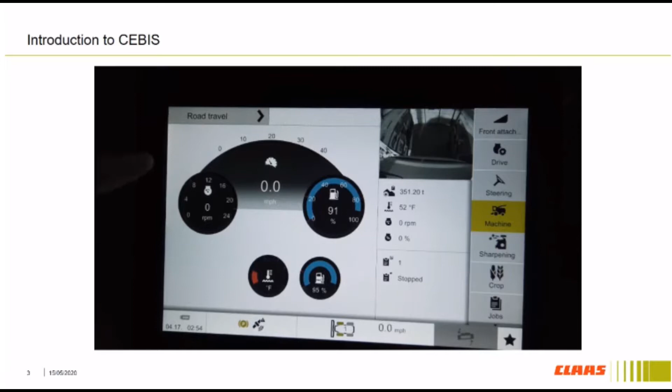So today we'll talk about generalities of the new CEBIS Touch monitor. First thing is we have two screens: what we call road travel mode, as well as our working mode, so you can see different menus depending on if we're on the road or in the field.

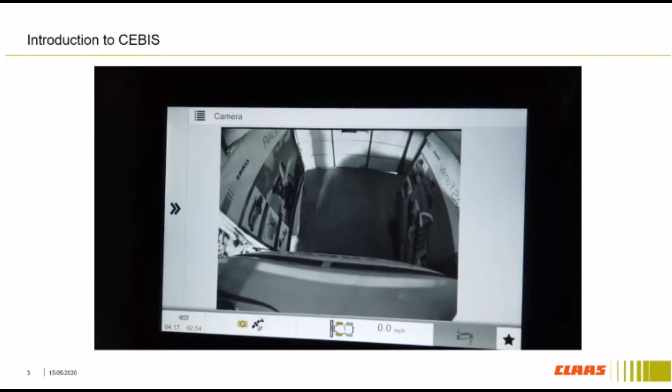Some nice things about the road mode is if you get the rear view camera, you can have that displayed in your monitor. If you tap it, you can have the rear view camera show up. If you're trying to hitch onto a wagon or just backing up, you can have that full screen.

If we go into the field working mode, we have a lot of different things that we can touch with the monitor to adjust. First one is our job counter. We can have 1 through 20 jobs, or if you get the task management, you can load up jobs from like Trimble, Ag Leader, or whatever into here to have more detailed looking jobs.

The chopper icon you see is green. That will show you where you can change your different settings on the machine. If you get cameras, like your rear camera, you can have that pop up there if you want to look at the stubble of the forage harvester, if you're making sure you're picking up the crop, or when you're backing up to something else. You can also make it go full screen to have really good visibility as well.

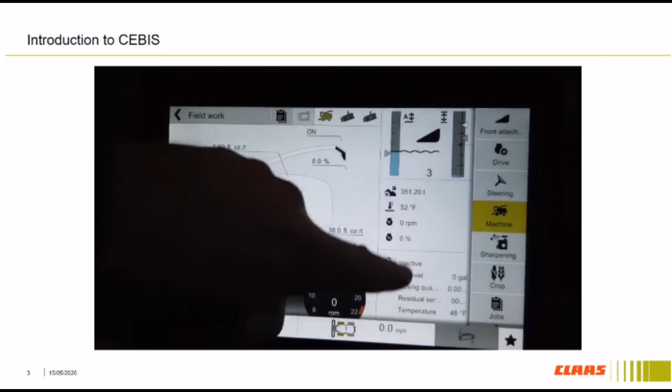We do offer cameras - you can have rear backup camera, you can have the Profi camera on the spout, or with autofill you can have the autofill show up there, as well as one of these three boxes on the side. So in these three boxes here, you can adjust to whatever you would like to see in them. So if you want, this is setting up our header heights and flotation.

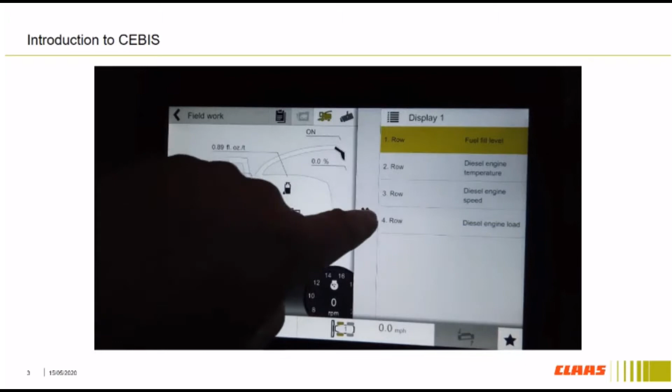This is just a normal display 1. You can change what you see on display 1, so you have plenty of different things. So if you want to see fuel level on there, you can have fuel level, and then always a double arrow gets rid of the screen. And there you can have fuel level.

And on the bottom one, just for example, we are showing we have the new ActiSiler 37 showing the details of what it's doing with fill level, temperature, how much is left, if it's active or not active, that type of thing. The main things to look at here in the working menu is we've got our different things we can change.

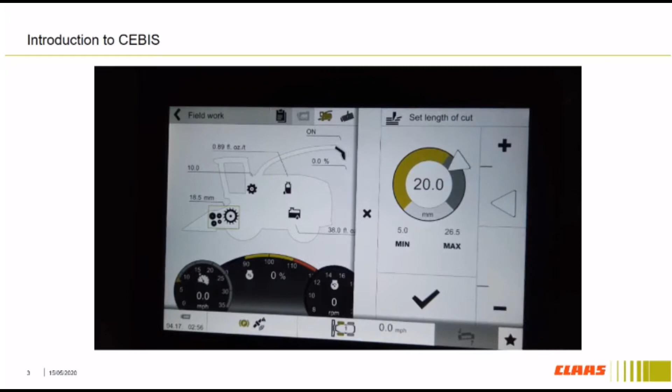So there's many ways that you can change this number. The first way is you can move the arrow back and forth by sliding your finger on the screen. You can use the plus minus key to change the length of cut, or you can tap on the number and type in the length of cut that you want.

And then the last one is over on the right hand side of the armrest, the back button. It looks like a knife cutting through some lines. You can manually adjust the length of cut there without having to touch the screen. So if you're going through the field and want to just adjust the length of cut a little bit, you can do that from the buttons on the side. And then you can see the screen goes away.

Across the bottom, we'll get into our hotkey functions, our favorite menu. You can see your ground speed at the bottom, and whether you're in first gear or second gear. With a four-wheel drive machine, if the front tires are green, that means it's in two-wheel drive. If the back tires turn green, it's in four-wheel drive. You can see your park, and then all the other options, which turn green when they're activated.

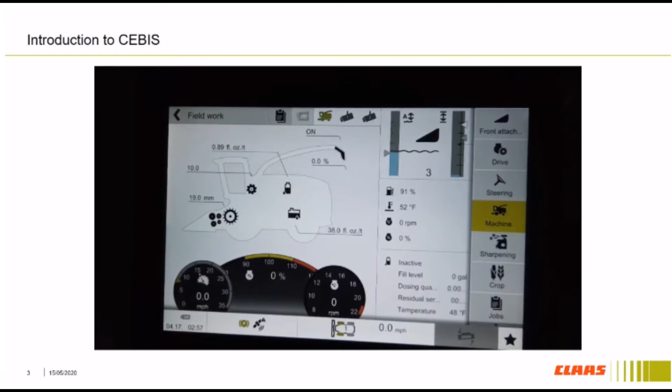Our front header attachment menu lets us assign what header is on, but with header recognition, typically when you hook up the header it should automatically pick which header. We can assign the working width, which helps for our acre counter. Partial widths let us account for things like a 24-foot 10-row head, so we can enter 10 rows. If we're doing a pickup and merging or raking 3 swaths into it, we can enter 3, which helps adjust the acre counter correctly.

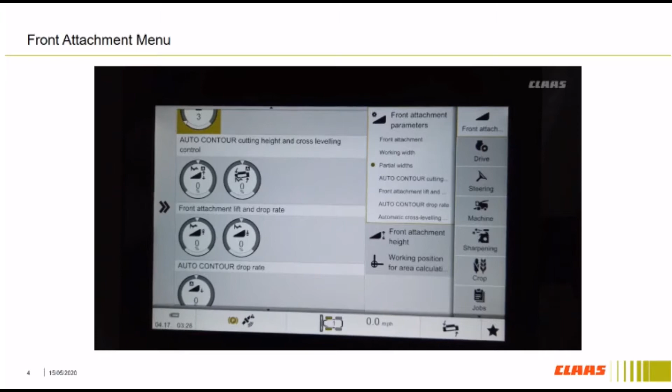With auto contour, we can adjust how fast it's moving, how fast the side-to-side oscillation is, and how fast the drop rate and lift rate are, as well as cross leveling. So with a corn head on, if it feels like the chopper is really jerky going through the field, you can turn down the side-to-side motion, and that will smooth out the chopper. It just means it's trying to measure the side-to-side too fast, and it's really jerking the chopper, especially if you've got smaller tires on in the narrow base format.

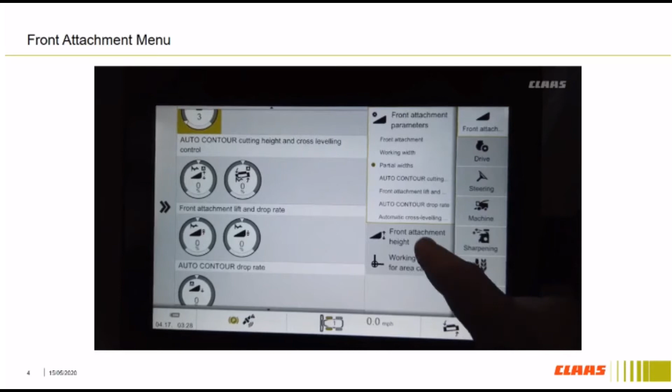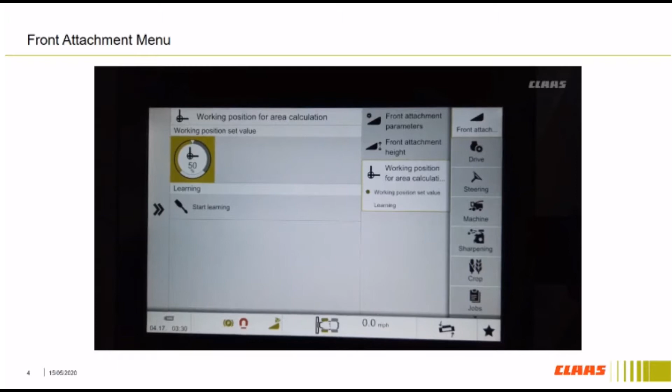Next is our front attachment height. If we hit our preset height number here, you see how it becomes bold. We can either tap here and adjust the height to what we want, and it'll learn that, or go into another menu we'll get to in a minute. Working position is when your inoculant, your acre counter, everything turns off. We want to set that for just a little below whatever height you raise the header to for headland, so it stops counting acres and shuts off your inoculant when you're turning on the headland. Follow the owner's manual instructions to learn your upper and lower limits. It's extremely important when you put a new head on that you learn the upper and lower limits, so the header can perform up and down properly.

Now we're going to adjust our header height. We turn our engine on, we turn our cutter head on. Please make sure things are safe around you before you do that, and again reference your owner's manual and all the safety procedures. So now if we want to adjust our header settings, let's say preset height, we hit the preset height button, and you see the little icon turns green, and we can then set the height.

We can either come into the monitor and hit the button here to change that, or we can use a little toggle switch that looks like header up and down, off to the right of the armrest, and you can see how it moved. If we hit the preset height button again, you see how it went to the white one, and that's how we would run a corn head if we had no auto contour.

As well as any other head, when we turn on the headland, we can set that height for headland height. Now we can do the flotation. We have an older header attached here, so that's why we're in a negative number. A negative number is using the float of the feed roll cabinet. If you're in a positive number, you're using electronic sensors on the hay head.

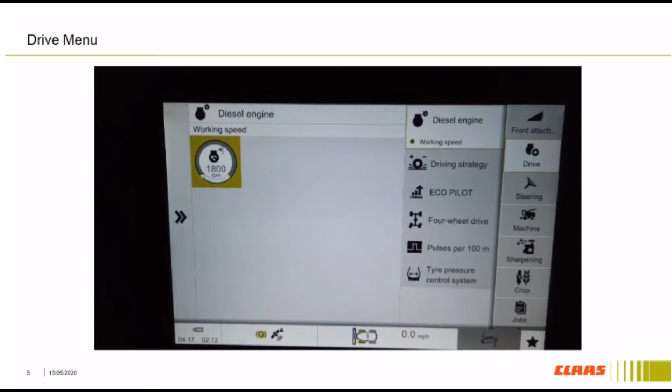Let's talk about the drive menu. When we select the drive menu, the first one is when we put our throttle to the middle position of how high it will throttle up. So currently we have it at 1800.

The next one is our driving strategy. When we push our joystick forward and back, the higher the number, the more aggressive it'll feel. It's kind of like associating it between a little 4-cylinder car versus a car with a V8 and how responsive the joystick is.

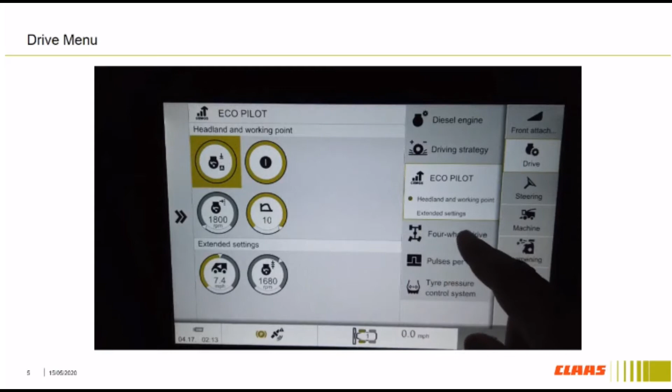The next one is our CEMOS AUTO PERFORMANCE. We can assign how much power we put to the front axle or rear axle in four-wheel drive. So if you're in really muddy conditions with a corn head and the rear tires are spinning, you can assign more power to the front tires to equal that out.

The pulses per 100 m are just simply if you've changed tires to calibrate your ground speed. And then the last one is your tire pressure.

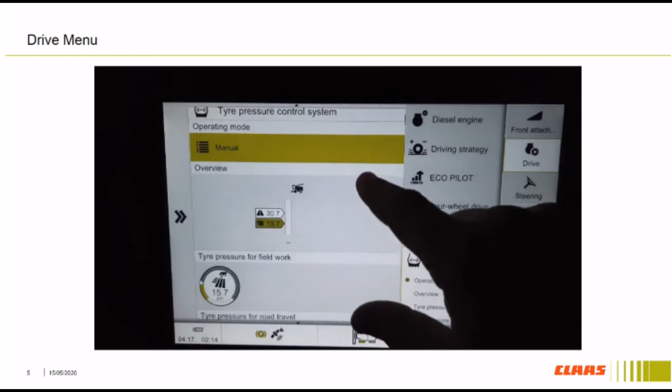This is an option from Claas. You can set in the field your field working pressure as well as your road pressure. If you do a lot of roading with your forage harvester, this is really an important feature, because in the field we can make it ride really nice, as you can see at 15.7 psi.

But when we're on the road and roading long distances with this heavy machine, especially if you've got an Orbis 900 on, having your tires aired up to the proper pressure will keep them from flexing as much on the sidewalls and will protect your tires better.

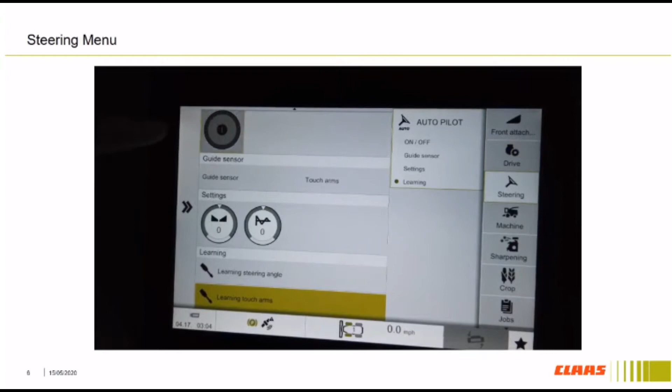Now let's go into the steering mode. To turn on autopilot, we just hit the green button. We can look at what sensor, so if you have Cam Pilot for steering on a windrow, the touch arms, or if you're using GPS steering, you would go with no sensor.

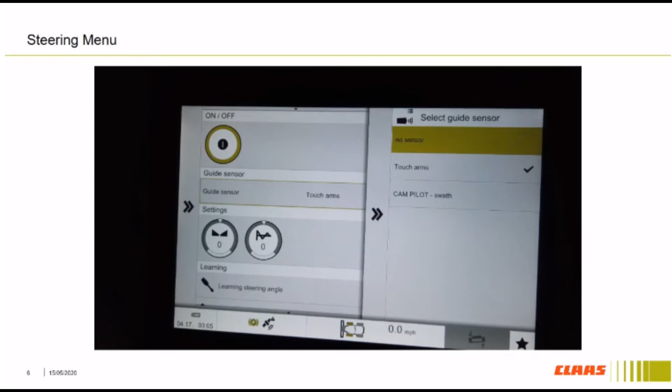You can adjust the left right if it's trying to go too much to one direction. You can straighten it as well as play with the aggressiveness. Down here on the learn the touch arms, you can learn the 0 point of the touch arms when you start out for the year.

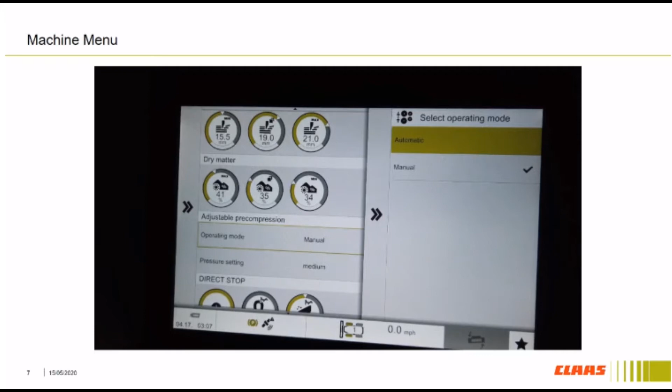But in certain situations, you can run it in manual. So for example, if you're chopping corn in October and it got frosted and it's really brown or the spider mites got to it, you can switch to manual, because if you were chopping at 21 millimeter, it's going to be set on weak. And maybe you're getting a little bit of raggy cut, you've sharpened your knives, the shear bar is good. What we have seen with this nice feature is then come in here and select medium.

And that will really help, because then the feed rolls are pushing down on the crop more, holding it better, and you'll improve your chop quality, so you'll have a lot more consistent.

Then the last one is our direct stop. Direct stop we can have on for hay head, so when we get metal or a rock, it'll stop us. We can adjust the metal detector sensitivity, as well as we can adjust the stone detector sensitivity.

Stone detector sensitivity will vary greatly depending on the crop, the conditions, as well as your length of cut. So we don't really have a good number to recommend depending on which situation. You need to adjust the sensitivity so you get 1 or 2 false trips a day. That is a really good way to know that you've got it set to get those smaller rocks.

Cutting cylinder. The only thing under the cutting cylinder is to tell the machine how many knives you have in here. If you go to half knives, you need to tell the machine that.

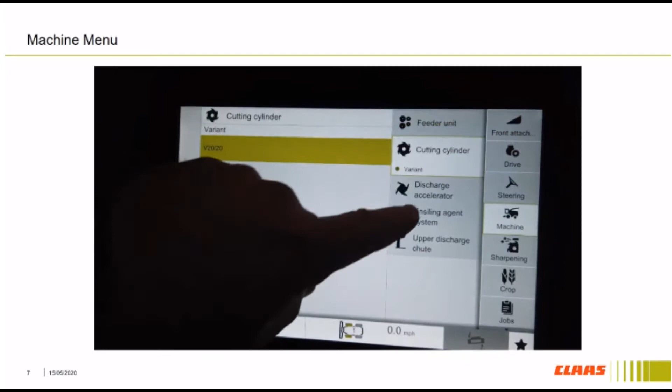Discharge accelerator, you can change the gap on the go. The learning procedure I won't get into today—follow the owner's manual to do that.

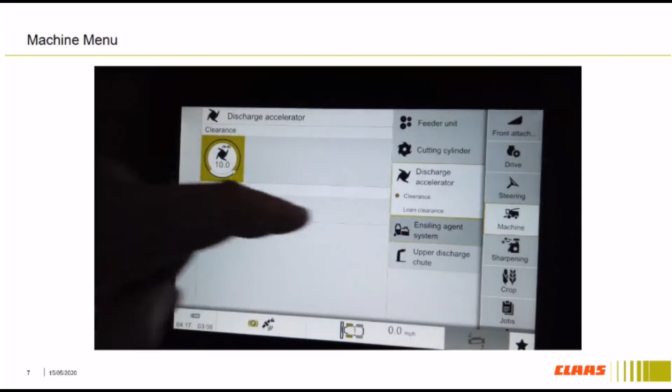The ensiling agent, you can assign if you get the optional Actisiler tank as well as a big tank. You can have them both going at the same time, or one or the other. The main big thing is if you have a moisture meter and a tonnage meter, you can do it by throughput dependence. If you want ounces per ton, you can do it that way. Constant is ounces per hour or gallons per hour. And material dependent, the bottom one, is if you want to adjust the amount of inoculant going on for moisture.

So throughput dependent is the most popular. What's nice with this is you can mix up your inoculant always to the same rate, and as you chop through the field, if you're chopping 100 ton an hour, it'll put on so many ounces per ton. If you're now up at 420 ton an hour in corn with a 990 pushing hard, it'll put the right amount on throughout. It's a very intelligent system.

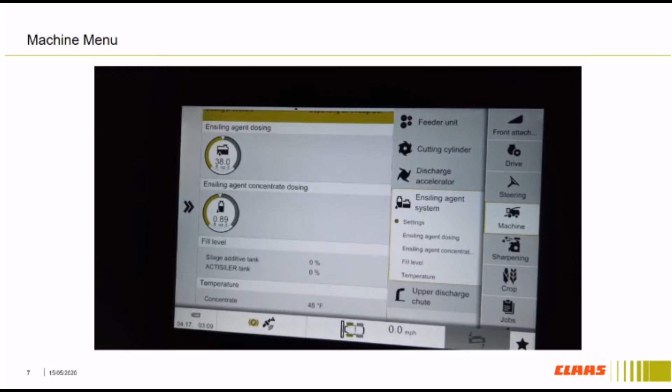You can also come in here to see the fill level of the tanks, as well as with the Actisiler, it'll even tell you the temperature of the tank.

The next menu we have is the OptiFill and Autofill menu. You can turn OptiFill on and off, and by turning it on, when you rotate the spout, it automatically adjusts your end cap, as well as on your joystick—the button that looks like a spout down button on the C-motion handle. When you hit that with the knife drum off, it'll park the spout for you. If you hold that button 3 seconds, it will automatically move your spout to the back, straight back position, for if you're going to do a cut through or split through the field.

Now when we get into the autofill menu, if you want autofill to work correctly with full function, you want to make sure you hit discharge flap and discharge direction. Autofill is also an option.

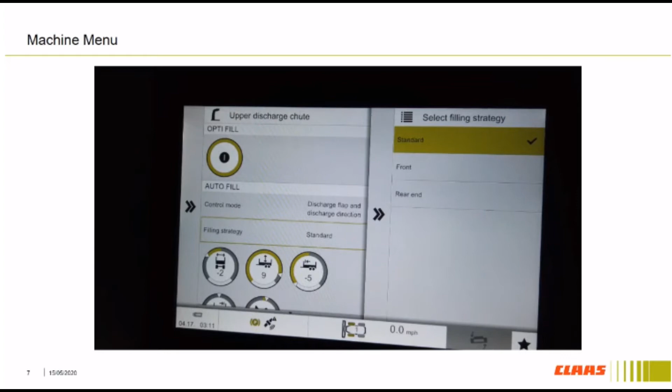Filling strategy—we always recommend if you have semis, use front to back, so it'll start filling the front, and as it's full in the front, it'll keep working its way back. If you're going to fill straight trucks, use rear, which means it'll start filling to the rear and make its way forward. So with autofill, you do need to adjust some different settings.

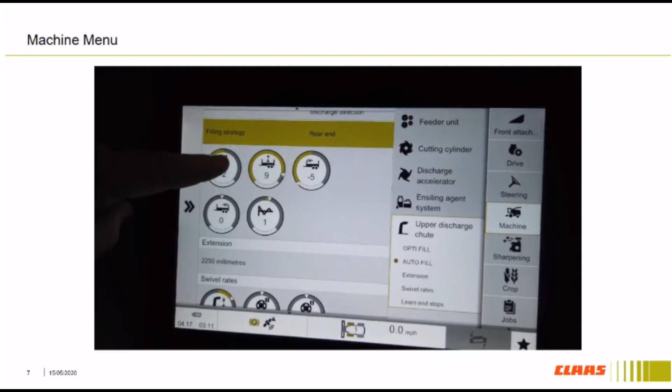This first one is how close or far away the end cap is throwing the crop in the trailer. So if you are getting the silage too close to you and it's coming off the sidewall near you, you just need to come into this menu and go up 1 or 2 numbers, as you can see here how the number indicates on the screen.

Fill level is done by measuring the bottom of the trailer to the top. So depending on how high your sidewalls are on the trailer, this number will be different, but we do recommend running the fill level so it's filling about 90% of the trailer, and then you manually top off the trailer—especially handy if you have different trailers.

The next menu over is how close you're filling it to the front. The next one is how close you are filling it to the rear, so you're not spilling off the back, as well as your filling sensitivity—it's how fast the spout will move. Typically stick as close to 0 as possible.

Now if you're changing spouts or extensions through the season, you do need to come in and tell it which spout extension you have in. Swivel rates will be the end cap. The rest of the spout rotations, please keep them at zero.

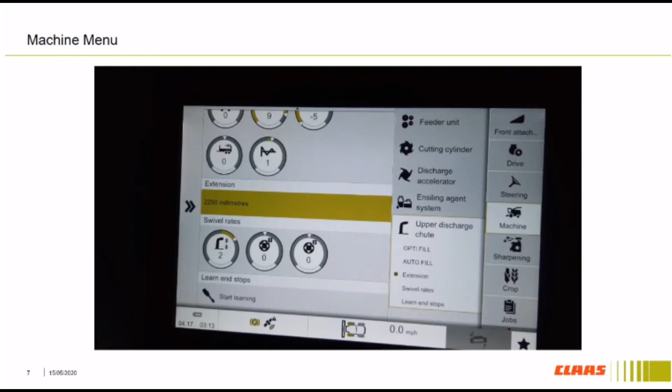Now if you change a sensor or do some adjusting, or you don't think autofill is working correctly, follow the owner's manual's instructions and do the start learning procedure to learn all the end stops of your sensors.

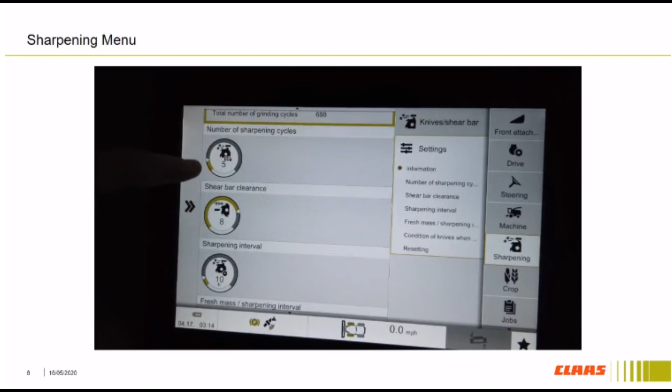Then under the settings, we can look to see the condition of our knives and when we should sharpen next. Right now we have it set for 5 passes. When we sharpen, we've got the shear bar clearance set for 8 and the sharpening interval for 10. You can also, if you have the tonnage meter, set it up to remind you to sharpen after so many tons.

The next menu we need to take care of is the quantimeter - the little wheat head with crop. This is where we adjust and calibrate the tonnage meter and turn on the moisture sensor. So the first is the crop type: maize is corn, grass, lucerne is alfalfa, sorghum, whole crop is wheat. One tip or trick out there in the market: if you're doing pre-boot or slightly above pre-boot, I recommend for the moisture meter's most accuracy to pick grass. If the crop is fully headed out or mostly headed out, then try to pick whole crop. There's a wide range for the moisture meter for this type of crop, so you might have to select which one is the best.

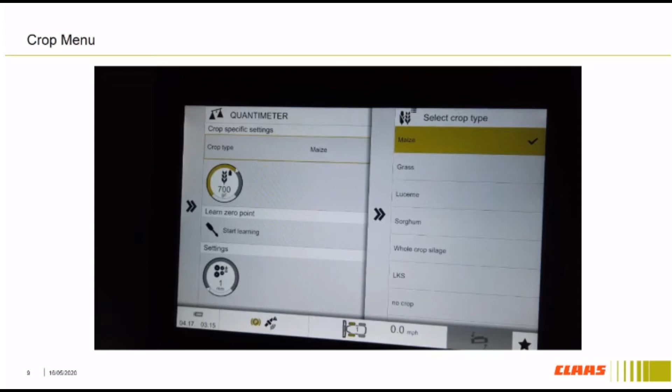The test weighing - so when we want to calibrate the yield monitor, we come into this menu, hit on, and go chop our load. When we're done chopping, we hit off, and it'll have counted how many tons the chopper thought it did. When you know the actual tons, you don't have to do it right away - you can wait until you find out what the tons are from the scale. You'll hit a little button above here, and then you can enter in the net tons. When you enter the net tons, it will change this calibration number.

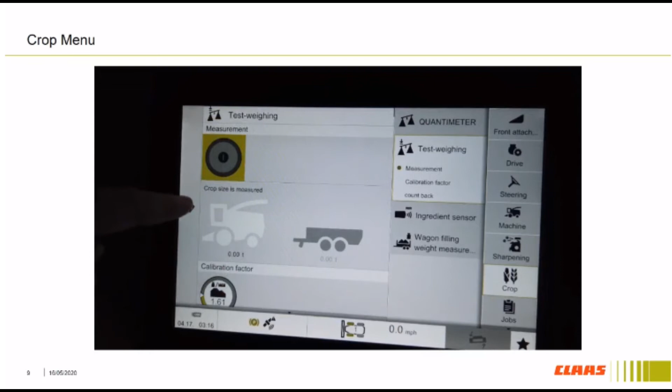Another nice feature: if you want to really pay attention to how full you're filling the wagons, you can have up to 3 different trailers and set how many tons you chop. When you start chopping into a truck, it'll start counting up, so if you have truck 1 selected in the monitor, it'll fill it to 12 tons, then give you a message on the screen telling you you're at 12 tons. When you stop, all you gotta do is hit the head forward button and it'll reset. Now if maybe you want truck 3 underneath you, use your function button and move it to truck 3, and then it'll chop until you hit 16 tons and give you an alert. You can change the tons to whatever you want for each of those 3.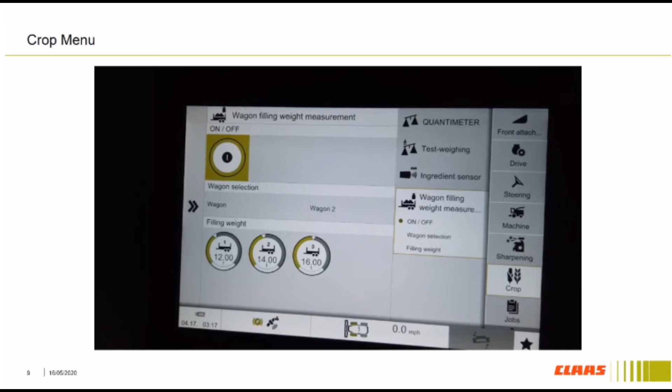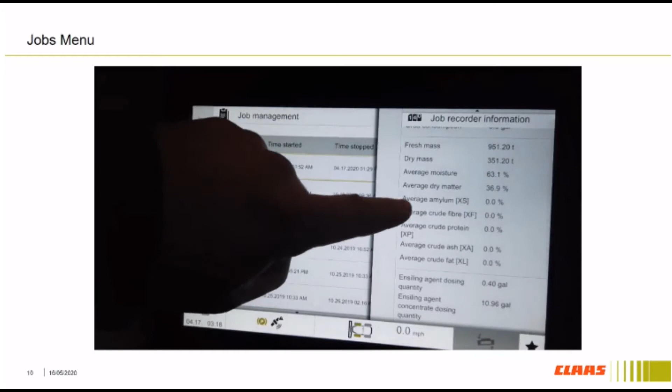In the job counter, we can come in and look at a job, clear the job, and look at the information. In the job counter we can see cutting hours, fuel consumption, tons per hour, and average moisture. If you have the moisture meter option, you can see how much inoculant you put on as well. We can come in here to reset it - all you do is push to reset. You can start the job, and you can calibrate even how many acres if you know what the field has for true acres.

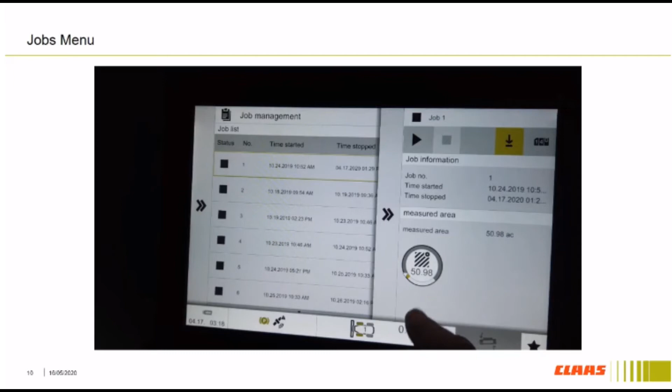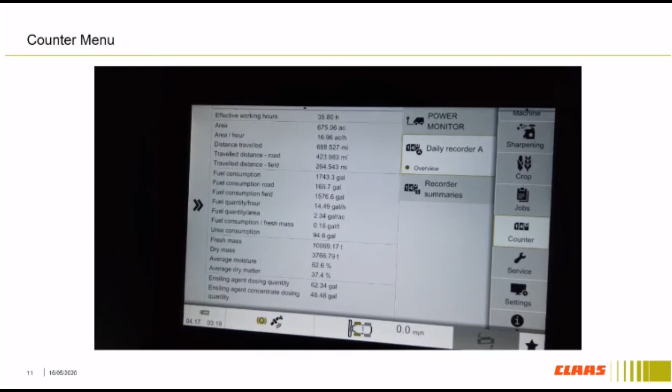The next is the counter menu. If you hit your daily recorder, you can come in and see this is your resettable recorder. You can again see your hours, travel distance, fuel consumption, how many tons you chopped, how much inoculant you put on, as well as - if you're trying to see what the true average moisture of the crop is - come in here, reset it. This is where we recommend you go chop a load and then come in here, and you can see your average moisture and average dry matter, a pretty good indication of what that truck averaged. You also have your total sum - so you can see this machine has 362 engine hours, the cutter head hours, and it gives you all of that information.

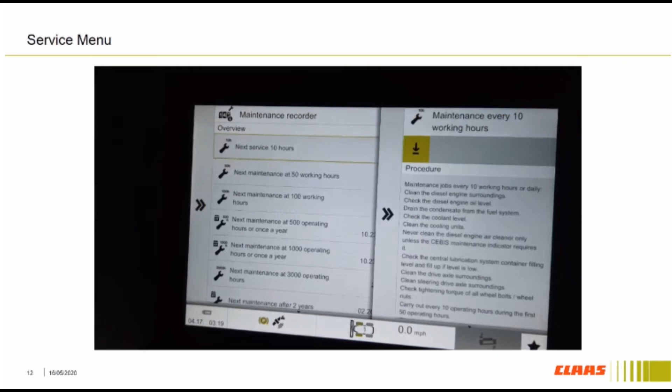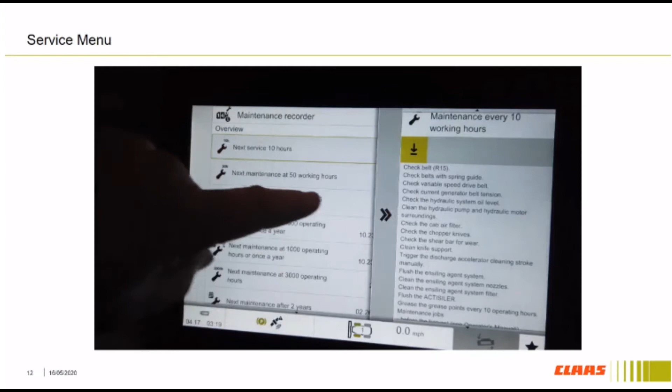Service menu. You can come in and clear out your reminders. To do that, just hit the arrow, hit yes, and it also gives you all the things that you should check for at your different service hours. So you can follow the owner's manual as well.

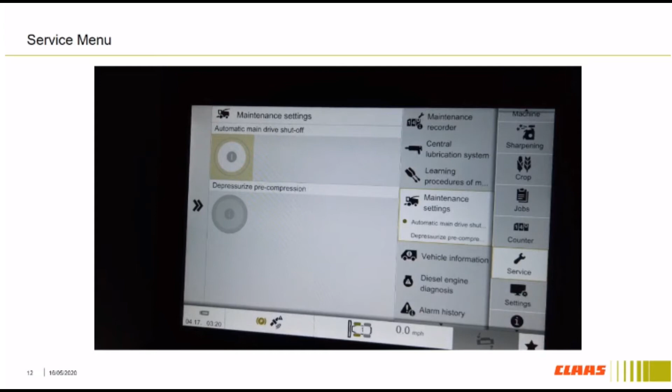Central lube. You can do a one-time lubing of the machine. This is where you can learn end stops of different sensors, maintenance settings. If you want, with hydraulic pre-compression, you can raise the feed rolls up. You have your vehicle information, which gives out voltages, temperatures, and you can look at all the different sensors.

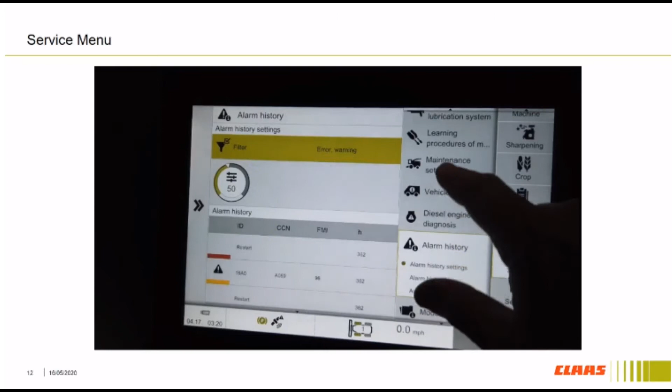If you're having an issue, you can look these up. Engine diagnostics, you can have some alarm histories. You can see the software versions on the modules. You can see the languages.

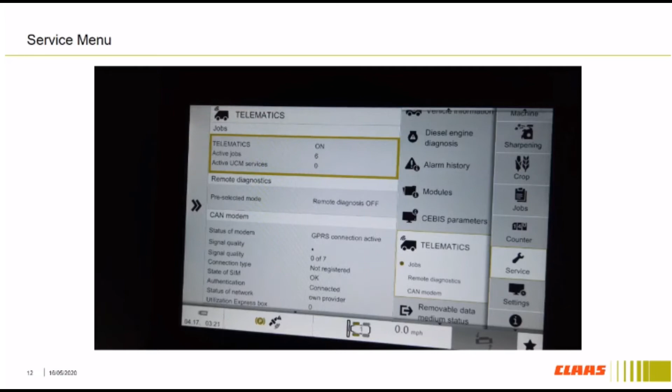Telematics. We highly encourage everybody to be using their telematics. Telematics is free for the first year. You can use the app or you can use the web-based program to see your machine, look at the status of the machine and all that good information.

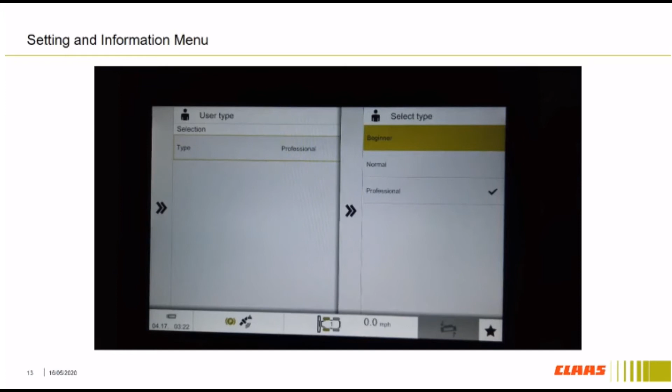So the next menu is settings. This is a really important menu. So you can change your operating modes, which modes show up on top. User type, professional, gives you all access to all things. If you've got an inexperienced operator in here and don't want them to make a lot of adjustments in the monitor, you can set the beginner mode.

Display settings, you can set the brightness of the screen. User defined - so these are these little boxes on the main screen, and you can come in here and select your display 1, you can select display 2, like we showed doing the box. You can pick what you want to read out in these different displays.

The favorite management system - this is a new option, now a standard feature on the new Jaguar 900 series with the CMOTION handle. So the button that used to be always on the old handle, the roller crop press button or side-to-side leveling for corn head, is now a favorites menu button. With the favorites menu button, you can have up to 7 positions. We'll get into this a little bit later with the joystick.

There's an up and down arrow, and you can select which one you want. So if you put the box on position 1, it will go to - you can see down here, right now we have the header side to side. But if you don't want header side to side, and let's say you want air horn on position 1, you can have air horn. By doing that, you can see here in the menus, we can select air horn, we can select spout up and down, and so on, so you can change it to whatever you want.

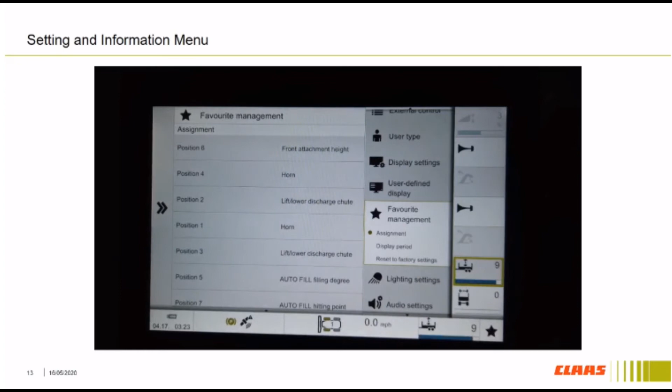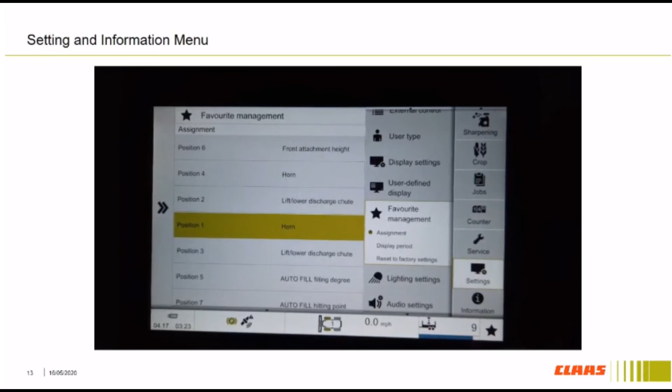So here, because we have autofill, we can have the autofill. Filling height, we can use that trigger from our roller crop press trigger in the past to change that. And you see once you stop pushing the button, it's down here in the bottom, and it'll even tell you at what number you're at. So you can put in different positions, different things for that feature.

Lighting - if you want the back lights to come on at night when you back up, you can do that. As well as with autofill, you can have the beacons, the flashing beacons come on when it senses the trailer is 75% full, to alert the next empty truck that you're about full with that truck and he can get coming on to your area.

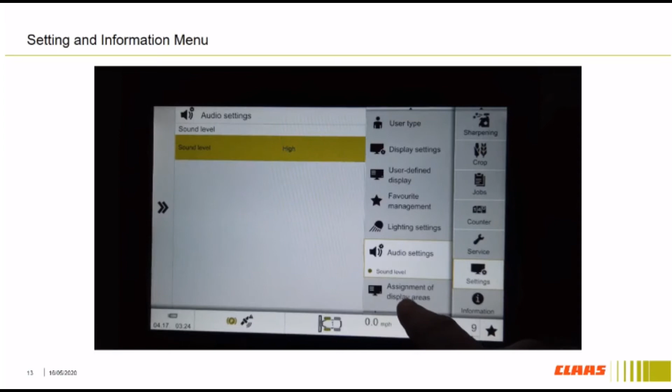Sound level, you can assign how loud the monitor beeps at you for codes and reminders. This is a very important menu, assignment of display areas. We do this so you can assign the boxes I talked about. So right now we have the header height boxes selected for number 1.

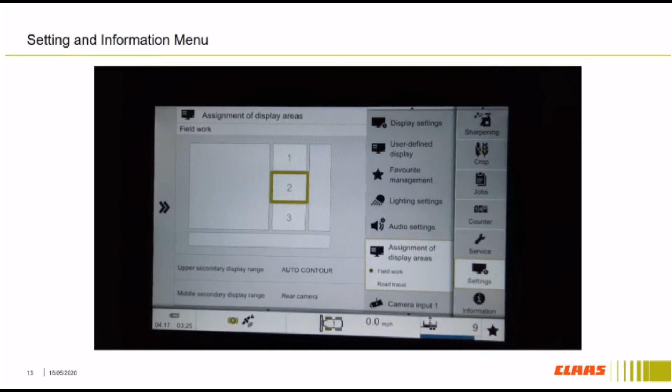We have display 2 set. So if we wanted to put rear camera there, now when I go back, you can see here we have the rear camera. So we can set whatever you want to put to that menu.

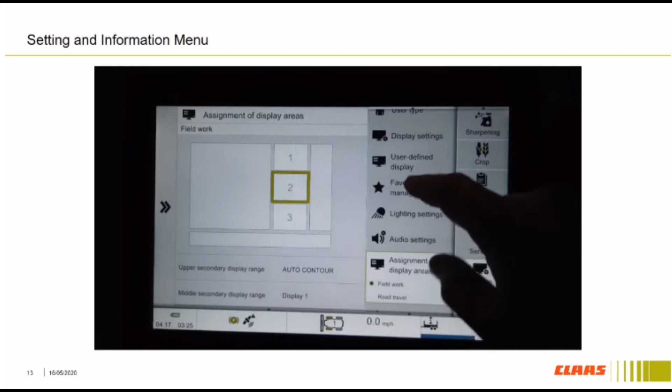Some other things - here we can assign our camera outputs. And then the bottom one is basic settings, where we assign English measurement, English language, miles or kilometers, the type of tons, acres, hectares, gallons, liters, and all of that type of thing.

Then the last menu is information. If a code comes up, you can hit that to get more information.

Let's talk about our new CEMOS Auto Performance. For 2020, it's only available on the Jaguar 970, 980, and 990 with the new series.

To access the CEMOS Auto Performance, you just need to touch the instrument cluster, and then you can see it come up. This button on the right turns CEMOS Auto Performance on and off. If you have that off, it always will stay at the same throttle.

If you turn it on, when you turn on a headland, it will reduce the engine RPM. If you stop for a truck, it'll reduce engine RPM. To save on fuel, we recommend using it.

Then the next one is when you put your throttle to the middle position, you can adjust how high the throttle goes up. With a Jaguar forage harvester, you don't need full throttle to achieve most of your harvesting, so we recommend setting that between 1800 and 1850, because all you're doing otherwise is wasting and burning fuel.

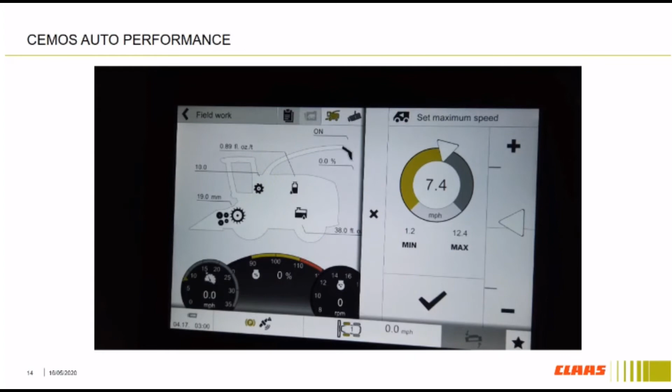Then with the CEMOS Auto Performance, this is the cruise pilot part, so you can set how fast you want the machine to go up to. In this case, we've got it set for 7.4 miles an hour, so if we're using full horsepower and not maximizing the capacity, it'll stop at 7.4 miles an hour. You can raise and lower that on the screen like we've talked about before.

The last one is setting how much it's going to lug the machine down to. In pickup work, we usually run 100 RPM or so higher than in corn, and this is where it's going to push the machine to. It's going to keep increasing ground speed and pushing the machine at full horsepower down to 1680, and if we hit 1650, it's going to start to slow the ground speed of the machine down to maintain the 1680. So in pickup work, we recommend 1680 to 1720 as a good range.

Now if we are going to do corn, we can lower that down to 1580 to 1600, and the machine's going to keep trying to increase ground speed until it is operating at the 1580.

The unique part of CEMOS Auto Performance with the dynamic power part is, if I'm at 7.4 miles an hour, it's going to decrease the horsepower and save on fuel. So if we're in light crops, you'll see down here on the display, if it shows 4 of 10, that means it's only using 40% of the total horsepower of the machine, and it's going to save a lot of fuel that way because it's not putting all the fuel in for the horsepower.

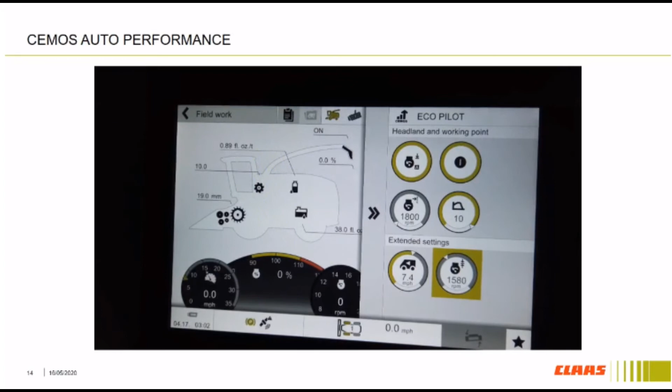Another nice thing about CEMOS Auto Performance is it doesn't get so jerky on the ground speed. So if you've got 50 yards of lighter stuff, instead of really speeding up for it, it'll gradually speed up a little bit, but it'll just decrease the horsepower, keeping it nice and consistent so the truck or tractor driving alongside can keep up with you.

Favorites menu. On the new CMOTION handle, if you have the CMOTION handle, you can have a favorites menu. When you hit the arrow up and down, you can choose which one you want. You see the yellow box? As soon as you let off the button, you see down here in the bottom, that's what you have selected. If you're used to the old Claas chopper, the trigger switch in front of the handle used to run the contouring side to side for your corn head or your roller crop processor, that's the button.

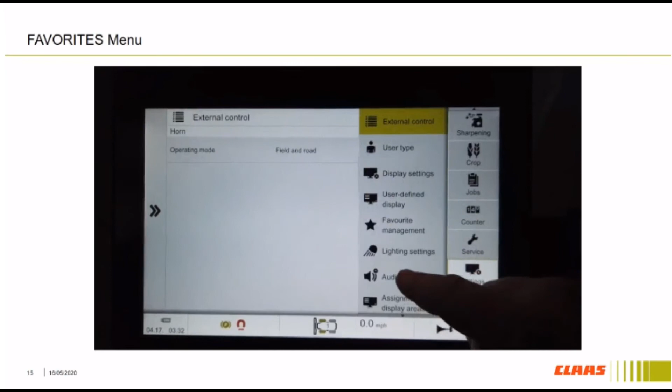You can now assign 7 different functions. So now if you want to raise your spout up and down, use the roller crop processor button because we have spout. Now if we move it to air horn, just tap the button and you can hear the air horn go. So we have different menus to do that. Then when you go into the setting menu and come to favorite management, this is where you can assign which ones and which position you want.

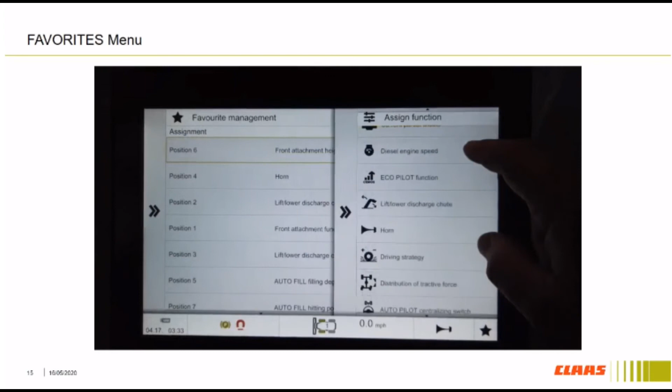So if you want a front attachment or something different, you can assign all of these different options. The favorites menu is a very nice feature. All you gotta do is hit your button up and down to change that function.

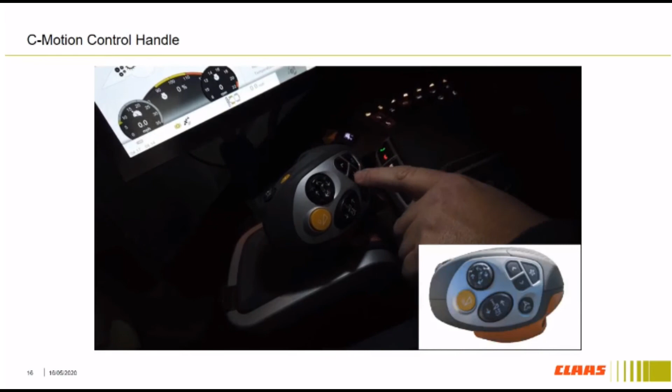The new CMOTION handle has many new features to it. For starters, we have the new favorites menu. These are the 2 buttons that we move up and down to select which icon you want. You can also pull up your favorites menu by hitting the star button, but typically we just use the arrow and move to the icon as we talked about before.

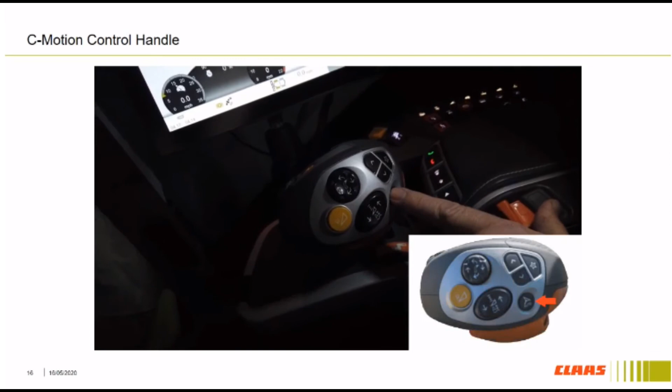You have your autopilot button down here, which signifies to turn on your steering, as well as if you have CEMOS Auto Performance or Cruise Pilot.

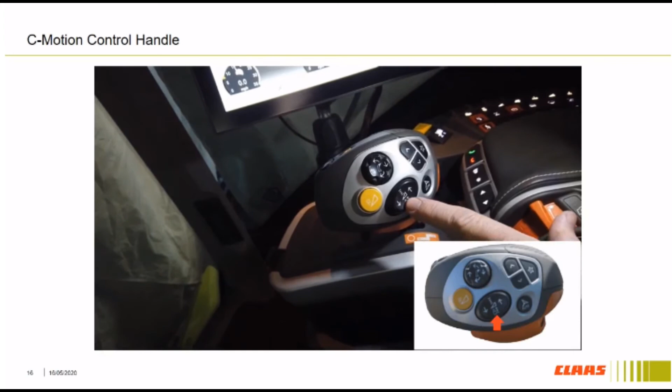The A is your flotation, or we call it auto contour. You use auto contour when you're using a hay head or a corn head that has auto contour wands on it. We use preset height when we want to turn on the headland of the hay head, or if you have a corn head that does not have auto contour wands.

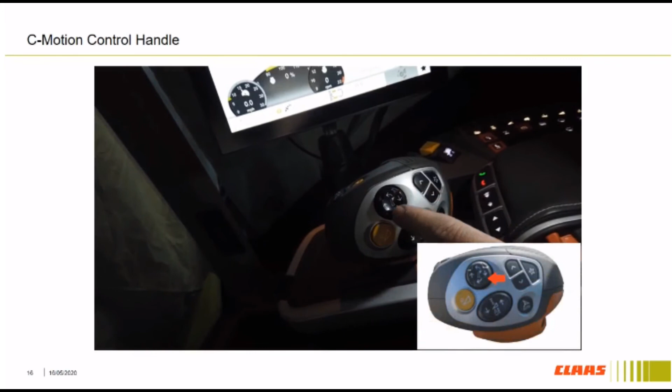We have our stop header or reversing header button. We have spout, end cap up and down, and then we have rotation. The rotation is 2 speeds, so if you hit it lightly, it goes slow. If you push it hard, it goes fast.

One thing to note with the new CMOTION handle is think about the spout rotation as moving your thumb left and right, and end cap up and down. That is the best way to think about it as you operate it.

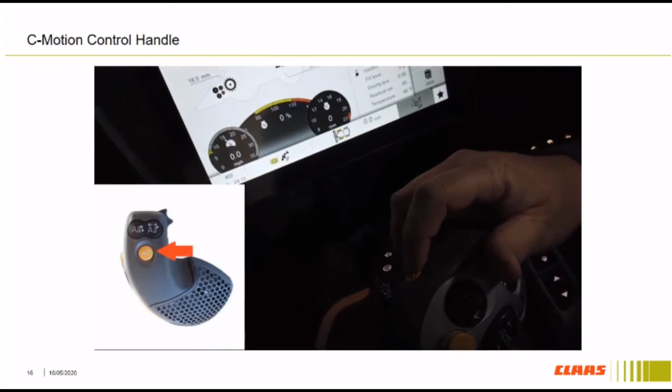On top, we have our header start button, as well as the OptiFill option. If you push this button with the knife drum off, it will park the spout automatically for you.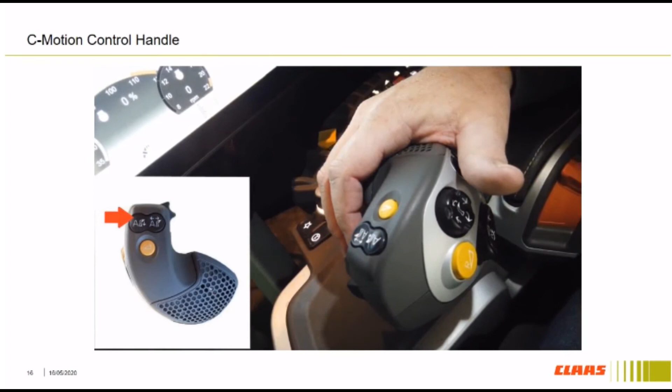If you have autofill, this is what turns autofill on and off. With the autofill turned on, if there's no trailer nearby or the system can't sense it, it'll have yellow lines on the monitor. If autofill is locked on and ready to use, the lines will turn green.

This button here you can program left and right of the spout. So if you hit it once, it'll go one side of the chopper. If you hit it again, it'll go to the other side of the chopper.

This button here used to be on the front of the handles, traditionally used for the roller crop press to raise and lower it, or if you had auto contour on the corn head, it would pivot the header up or down, side to side.

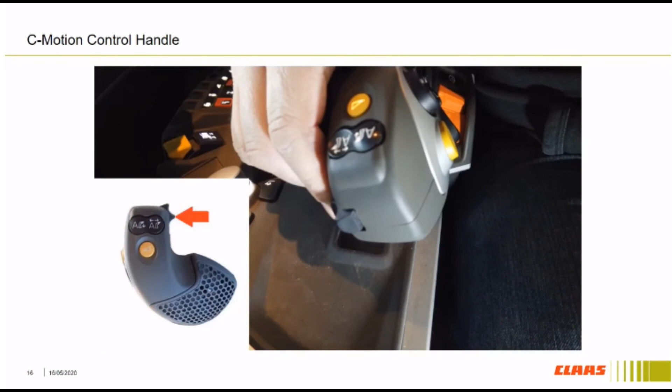With the new feature of the favorites menu, this is the button that you activate to select one of the 7 favorites. So if you want the air horn on there, you use the arrows up and down to get air horn, and then you just push the button for air horn.

With the new Jaguar 900 series, we have a whole new armrest of buttons. So we have our first 2 buttons to shift the forage harvester transmission from first to second gear. This is how we can activate full drive.

Parking brake, so if we want to engage the parking brake, if we bump the lever, it still doesn't move. This engages the inoculant, so when we hit the button, see how it turned green? Now whatever we selected in the CEBIS screen is what inoculant will go.

This is where we fold our corn headers, and then our spout up and down. And remember, spout up and down can be one of our favorites menus if you have a C-motion handle.

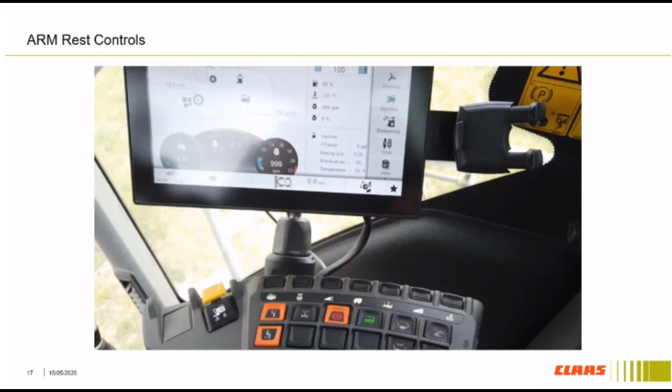Then up on top are some nice toggle switches. As we talked about previously in other videos, this one is our length of cut, where we can change our length of cut here.

We can change our header speed if you have hydraulic header as an option. This changes your autofill height. This is a really nice button to have if you have different trailers, to set the maximum height.

We've got our header height. So if you want to just bump it, if you got a corn header and want it a little bit higher or lower, you can do header height.

This is to center the machine. And if you're really critical, you can change how many rows you're taking to calibrate the acre counter.

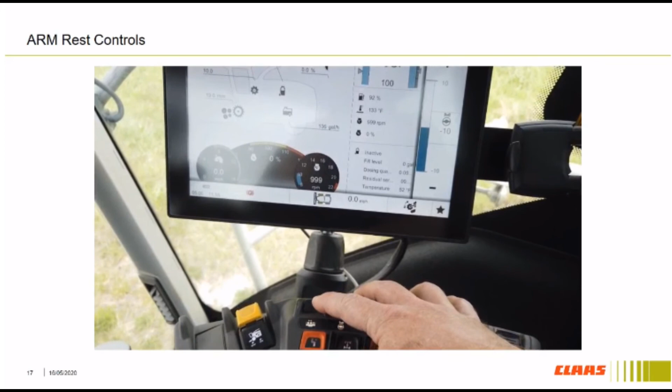And then here, if you push down and pull back, that is how we engage the knife drum.

If you've ordered your machine with the Claas radio, you can get Bluetooth capable. You can answer the phone with the green button, hang up the phone with the red button. You can change the volume with these buttons.

To get your Bluetooth activated with your phone, turn on your Bluetooth, and when it sees it, it'll ask you probably for a passcode, and that passcode is 1, 2, 3, 4.

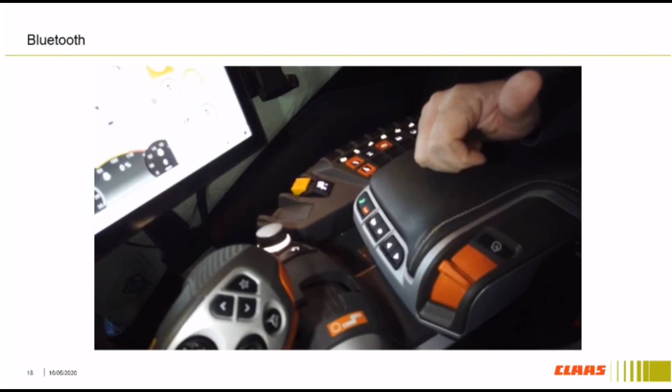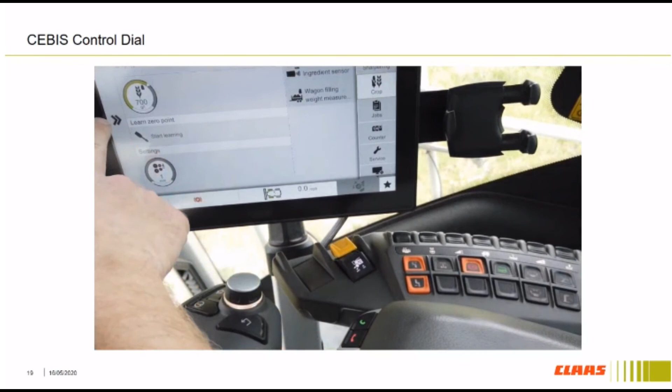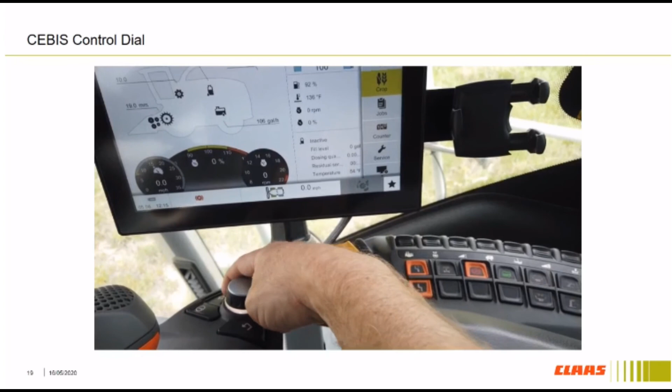With the new Jaguar 900 series, we still have the traditional scroller where we can move the icon on the monitor, but we can also touch the monitor. If you want to engage whatever menu, you just push down. If you want the traditional old button for escape, you can push the escape button here, or hit the double arrows on the monitor to escape. A little eye icon gives you more information on the monitor, and the star is for the favorites menu.

A really nice feature that the Claas Jaguar 900 series has is a start chopping menu and a regular chopping menu. In other terms, you can set the chopper up to have certain settings when you're doing a split, like in corn, or a cut through, depending on the language used in your region. So if you're chopping with a truck behind you, you can have one setting, and when you have a truck or tractor alongside of you, you can have different settings.

The way to adjust this and set it up for the first time is you have to have the engine safely on with the knife drum safely on. You come into the machine and go down here to own machine settings. Again, they will not be here unless you have the knife drum on.

The start chopping mode is when you want it set up so when you're making a split through the field, maybe you want the engine RPMs to be a little bit higher when making the split. You can have dynamic power on or off, and cruise pilot on or off. What's really nice is you can have direct stop off, so the chopper doesn't suddenly stop if you got metal out there and then the truck or tractor bumps in the rear end. But when we're chopping along the side, you can have that on.

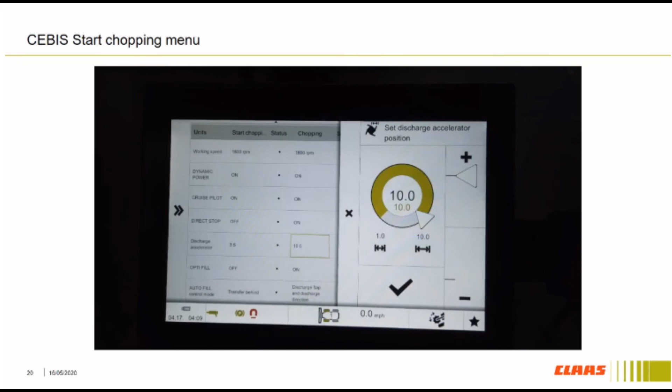Another great thing is if you have the hydraulic accelerator gap adjustment, you can have the accelerator gap come in really tight so the machine will throw the crop far behind you, or you can have it wide open when you're alongside, to gain more efficiency and less wear on your spout. You can also, if you have the OptiFill option, have it turn off when you're doing the split through the field, or if you have the autofill menu, what's really nice is when you're doing the split and you hit the one button, it will turn autofill to rear filling versus side filling.

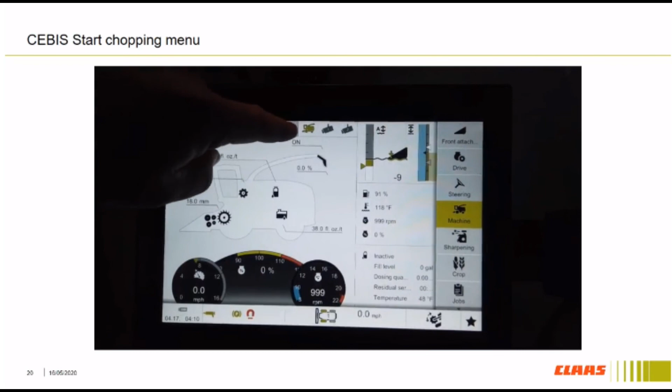So with one button, we'll show you here in a second, you can do all that. Once you've got your settings set for making your split and then chopping alongside, you come up to this little menu right here, and then you can hit start chopping if you want to make a split. Now, as you can see, the accelerator gap is moving. Autofill is going to the rear position, and it changed the RPM settings that we had.

Now you can get out of there and do your split. When you're turning around, come up here, hit chop mode, and now the chopper will be set up so when you're chopping alongside, it'll have all the settings you've pre-adjusted for that.

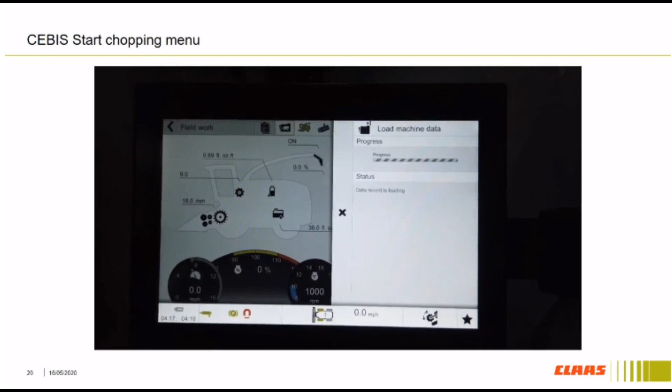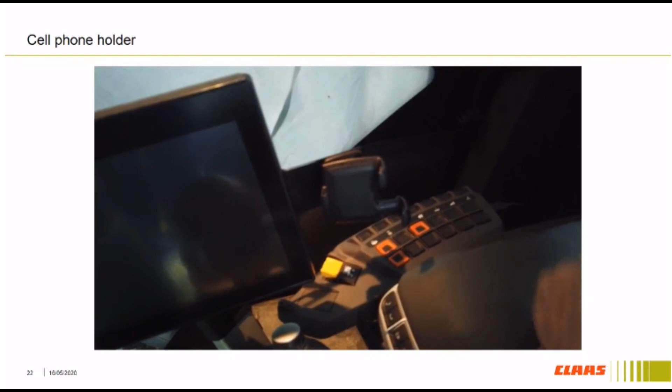Cell phone holder is standard with the new Claas 900 series, but you have different adjustments for different phones. When you put your phone in, you'll pull this open and set the phone in. But if you have a big wide phone with a case, as you can see this is pretty narrow, there's a button on the back you push, and then you can slide the tabs out, and now you've got plenty of room to put the cell phone holder.